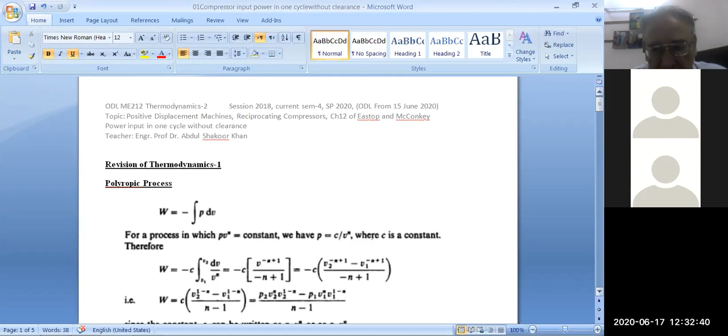Now, in the waiting room, I am admitting two more, and let me start the lecture. So on the screen, can you see my screen, my computer screen? Can you see my lecture notes, this document?

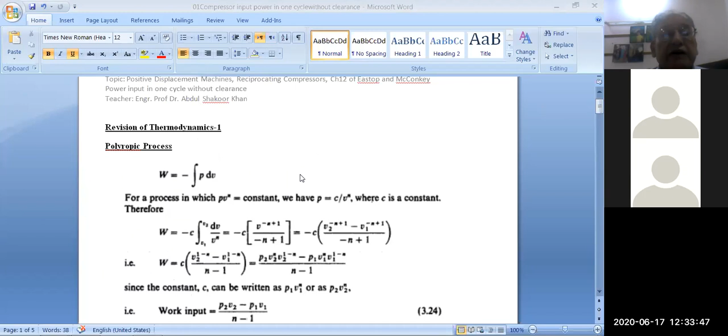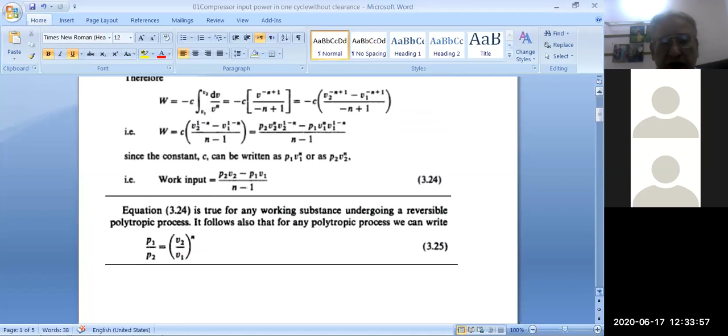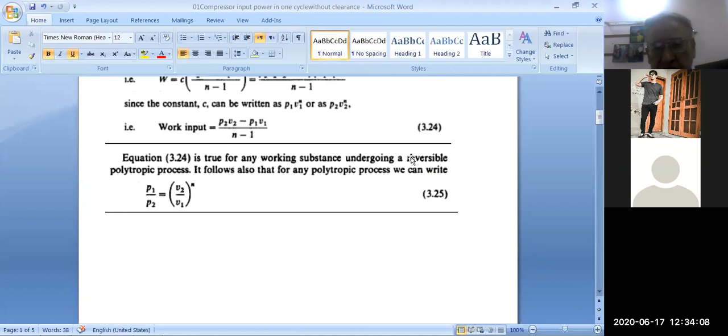Bismillahirrahmanirrahim. We have learned in thermodynamics 1 about the polytropic process, isentropic process, and isothermal processes, and we have presentations like this. So work input for the polytropic process is derived from the integral PdV, and in PdV we put PV raised to n equal to constant. From there we derive this relation, equation 324. Now we will need the relationship P1 upon P2.

Now Hey, what do you want? Hello? Now,

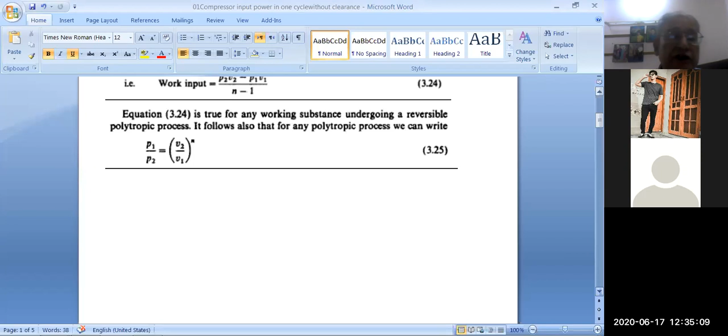Now, equation 324 and 325 are in front of you. Can you see it? So P1 upon P2 is V2 upon V1 raised to n. This was derived in thermodynamics 1.

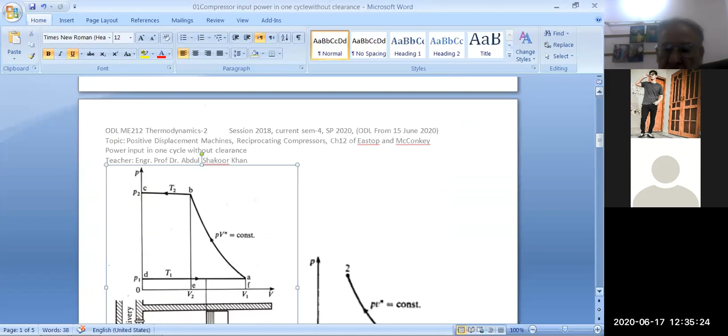Now we are talking about reciprocating compressors. In reciprocating compressors, we first draw this diagram, which is called the PV diagram. This PV diagram is also called the indicator diagram, pressure versus volume.

My God, it disappeared. Here.

So, pressure versus volume diagram, process A to B. A to B is what is happening inside the compressor, the compression process, and its process formula is PV raised to n equal to constant, which is the polytropic process. D to A, at pressure P1, temperature T1, this line DA shows the intake or induction stroke. 1 to A to 2 is compression, and from B to C is exhaust at constant temperature, pressure P2, temperature T2.

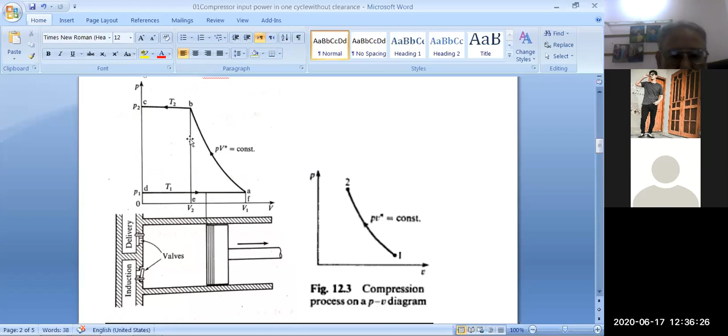In order to find this pressure and temperature at T2, we can use the polytropic formulas, and work input is equal to, from this diagram, the area behind the curve. So this is equal to this.

Actually, this chapter I have already taught you before midterm, so I am revising it now.

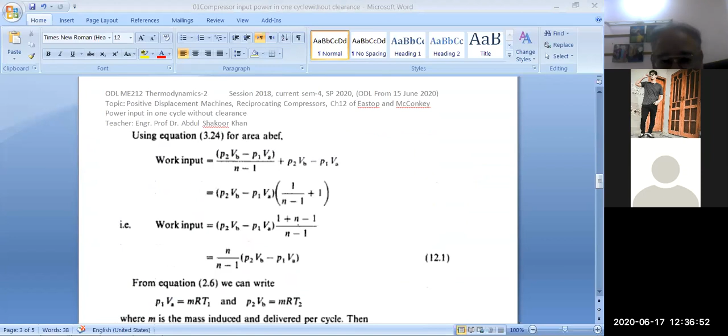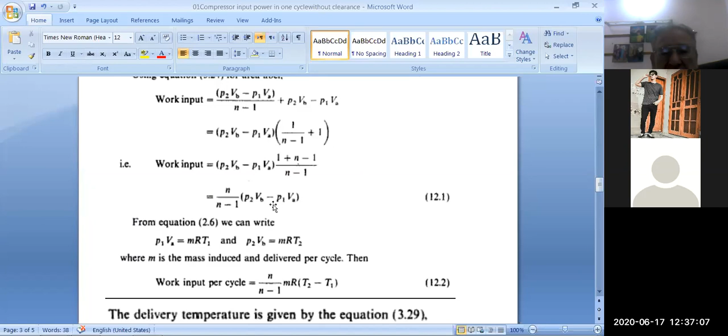So work input is equal to P given in this formula after deducting this area from total area. So we get N upon N minus 1, P2 VB minus P1 VA. Actually VB is equal to V2, and VA is equal to V1.

Again, go to this diagram and you can see how it is done. This total area is equal to work done. Look at this, A, B, C, D, A. This is the cycle, and work done in one cycle is area A, B, C, D.

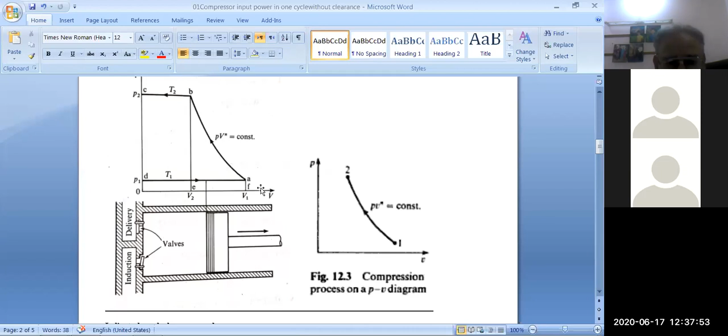So total area under this curve PV raised to N is first calculated, and then total area under curve CB is calculated. Then sum of these two areas, we subtract this area below AD, which is AD0F. If you see this diagram and then see this formula, you can understand how it is done.

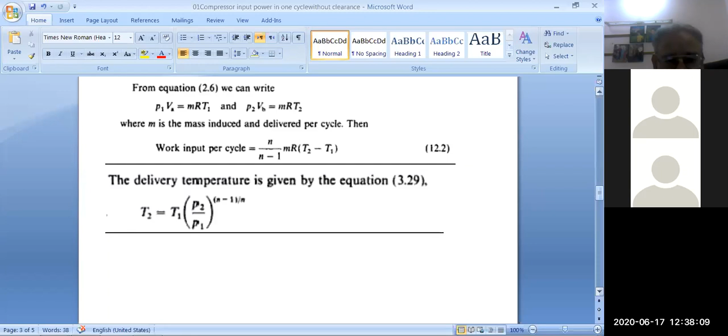In this way we derive equation 12.1. Then from equation 2.6, thermodynamics 1, we know for an ideal gas PV is equal to MRT.

So P1 VA is equal to MR T1, and P2 VB is equal to MR T2. From here we can convert volumes into temperatures. So this work input in one cycle is equal to N upon N minus 1, MR, T2 minus T1.

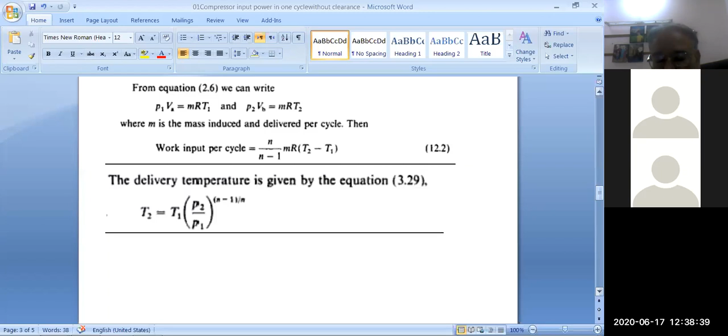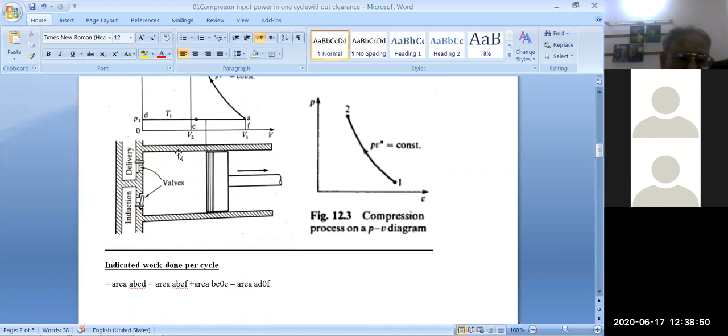Remember, this formula is only for this type of cycle where there is no clearance volume. Clearance volume is the space between top dead center and the cylinder head. So it is assumed in this derivation that there is no clearance volume.

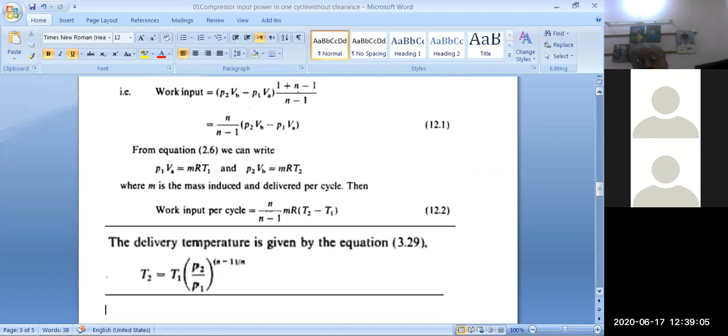Without clearance volume, this will be the work done formula. After this, we need temperature T2, which can be calculated by this formula: T2 upon T1 is equal to P2 upon P1 raised to the power N minus 1 upon N.

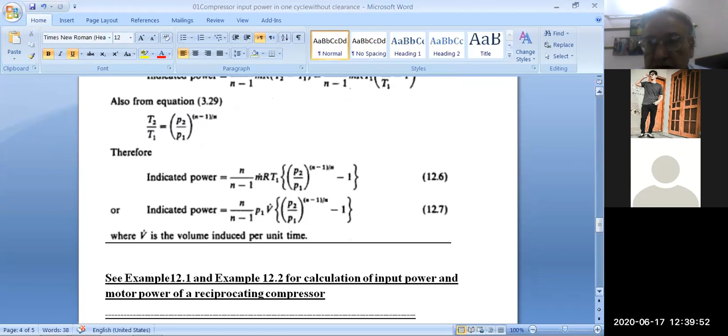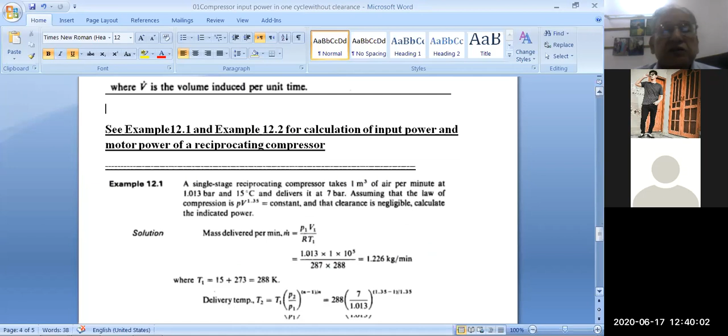Now we will finish here.

Now there is an example, solve 12.1. I'll give you this — it is in the book, and you will do it at home.

So let me open then another document.

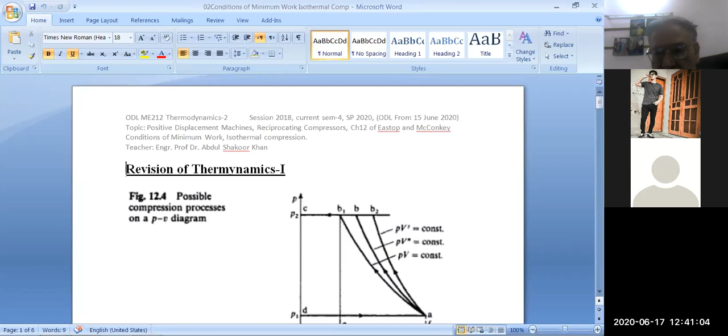Now I'll give you another document. Now can you see my another document — revision of thermodynamics 1, 12 point, figure 12.4 in front of you? Can you see it? Yes.

Okay, now the topic of this document is positive displacement reciprocating compressors, and we will derive now the conditions of minimum work.

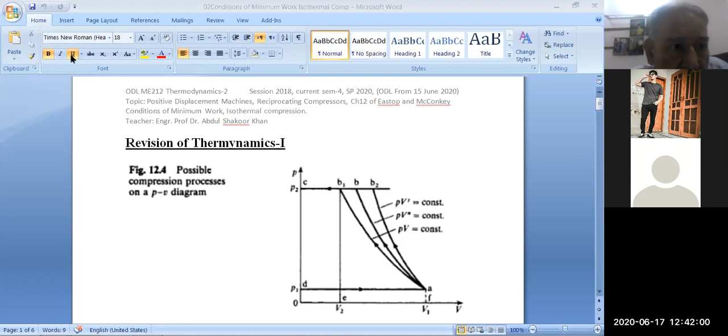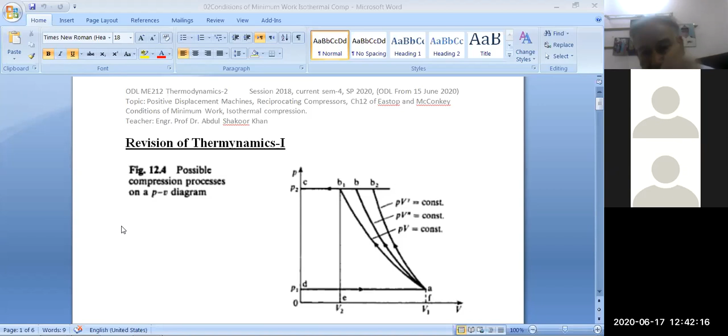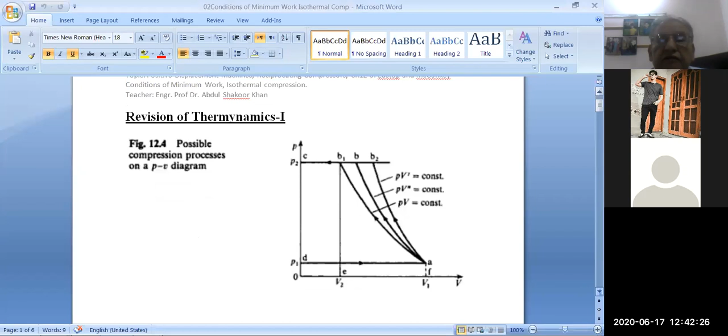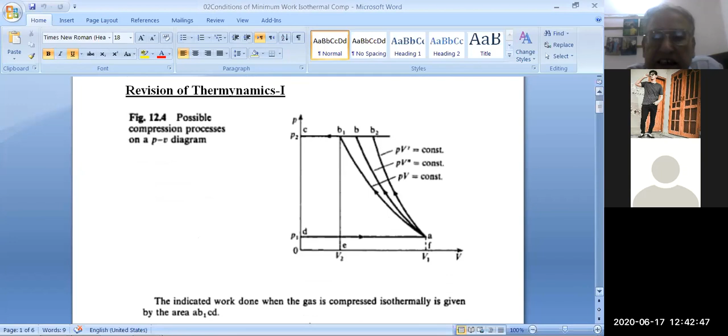Can you listen to me? Hello? Can you hear me? Yes sir, no sir, can you hear me? Everybody, can you hear me? Can you see the screen also? One says yes, the other says no — how can I continue my class? You have some problem with your own devices, learn to operate them properly. Network issue, no jokes on the online — okay, you're wasting my time, this is only a 30 minute lecture.

Now, A to B, A to B1, A to B2. These are three lines shown, processes from A to B, A to B1, and A to B2.

So A to B, the central line between these two, is PV raised to N equal to constant, that is the polytropic process. This outer line AB2 is PV raised to gamma, that is the adiabatic or isentropic line. AB1 is the most desired line because it has the least area of the cycle.

A, B, C, D — this diagram makes a cycle, and A, B1, C, D represents the minimum area.

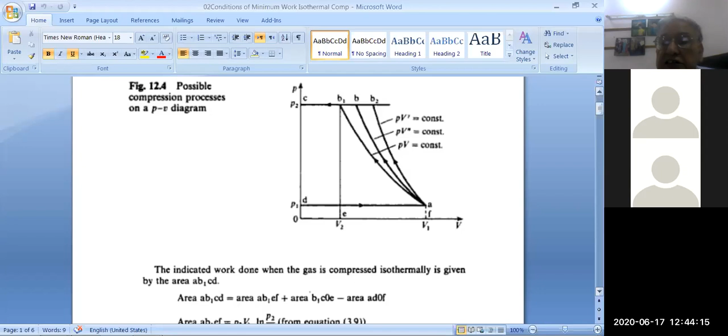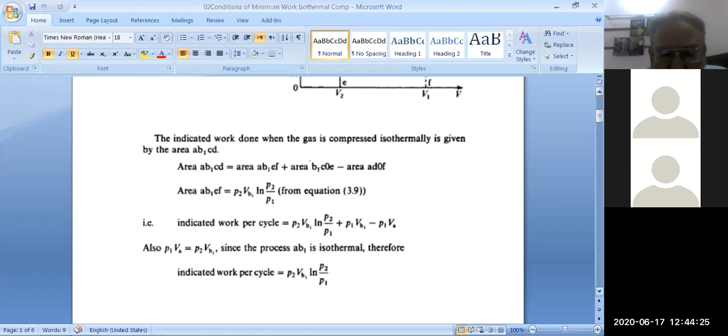So if we need the work input in a compressor to become minimum, then we must operate the compressor with cooling, such that its temperature does not increase during the process of compression. This is called isothermal compression. So the isothermal process is the most effective process from the point of view of minimum work input.

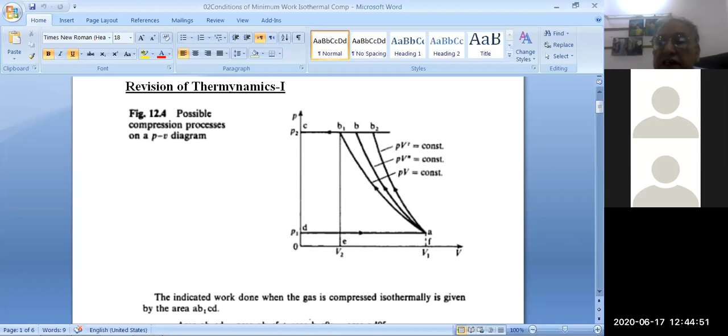So here also we can calculate area like this. Total area AB1CD is equal to area AB1EF plus area B1C0E minus area, which can be seen geometrically from here. This total area equals area under this curve plus area under this curve minus this area. So area AB1EF is equal to P2 VB1 multiplied by log P2 upon P1, and from here indicated work per cycle can be calculated as P2 VB1 log P2 upon P1.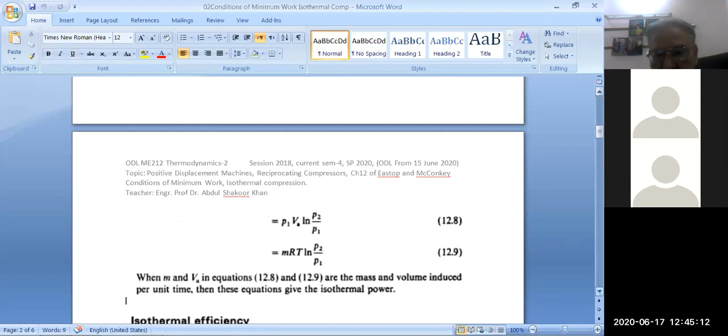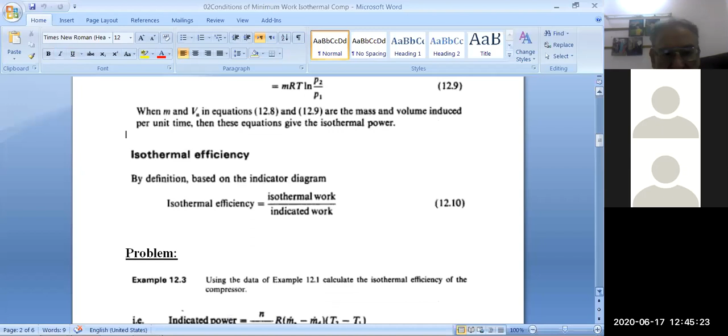Now from here we can calculate that work done isothermally is equal to MRT log P2 upon P1. Now isothermal efficiency is defined as isothermal work divided by indicated work, given by equation 12.10. It is in front of you.

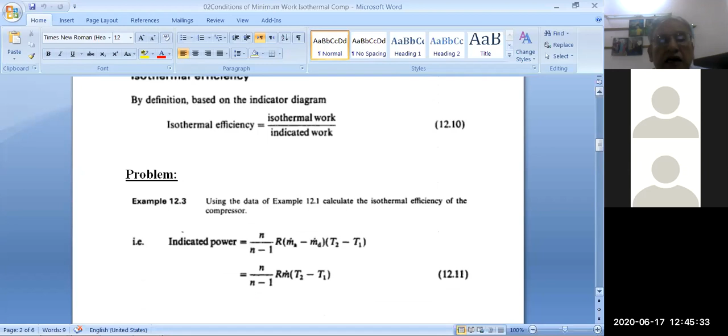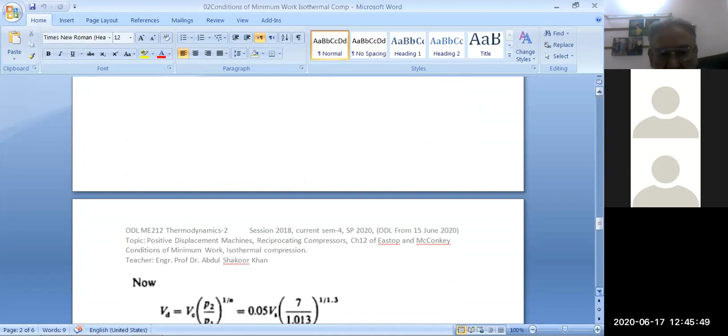Now after that you will solve example 12.3, it is in front of you, in the book and rewritten here also. Then there is problem 12, also solved as example 12.4. Then there are these two solved examples here, and you will see at home. Do it with your own handwriting and submit it as homework. Then I'll give you separately homework with a given day.

So with this I must go to the next page, which is compressor work in a cycle with clearance. Up till now you have seen the polytropic process and isothermal process of a cycle where there is no clearance in the compressor, and now with clearance there's a lot of difference. Why? Because...

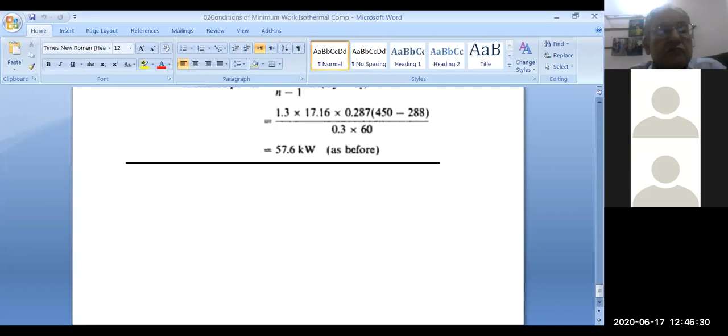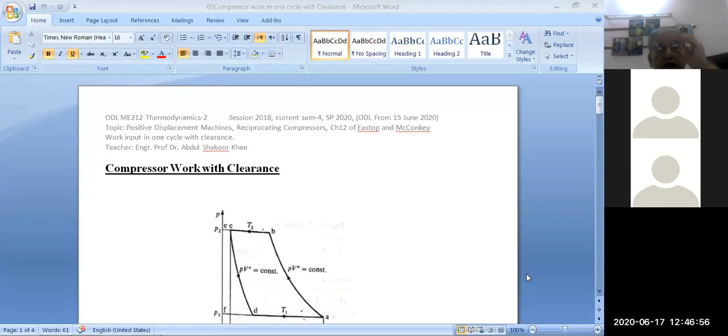Now let me share again. So compressor work, can you see it? Now on the screen should be compressor work with clearance. Am I right? Can you see this page? Compressor work with clearance.

This PV diagram is different from the one shown previously on the last two pages. But here, this is the clearance, CE, this space, VC, shown with my cursor. This is because after compression from A to B, the discharge valve will open, and at constant temperature and pressure P2, T2, gas will discharge. But the compressor piston has to come back from top dead center to bottom dead center and reach this point D. This is the compressor, this is top dead center, this is clearance, and this is after return to bottom dead center. But there was gas trapped in the clearance volume.

Because suction and discharge valves close immediately after top dead center, and when the compressor moves from top dead center towards the right, towards bottom dead center, fresh induction will not come in unless the previous gas trapped in the clearance is expanded up to point D. Because of this, there is a lot of effect on the efficiency of the compressor. The compressor cannot take full induction because of this entrapped gas inside.

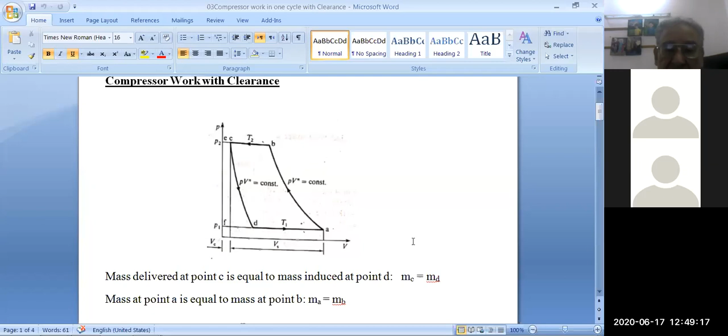So actual suction volume is less than the displacement volume. Displacement volume is just the physical volume which the piston travels from top dead center to bottom dead center, shown here as Vs, the maximum volume available. But actual volume is DA, so VA minus VD, this is called the induction volume.

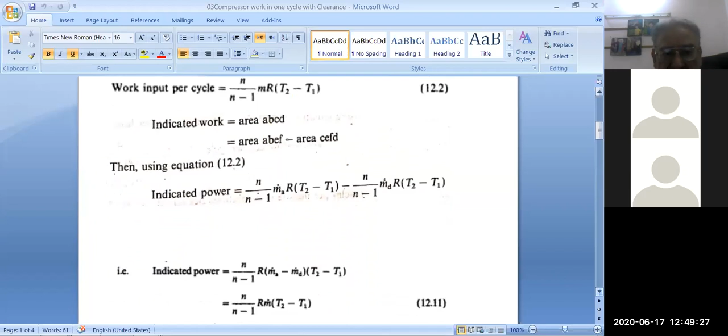So work input in this case will be N upon N minus 1, MR, T2 minus T1, and indicated power with the help of area we can calculate like this. Indicated power finally is equal to equation 12.11. And since temperatures can be converted into pressure, because we know that T2 upon T1 equals P2 upon P1 raised to N minus 1 upon N, with the help of this we can calculate like this.

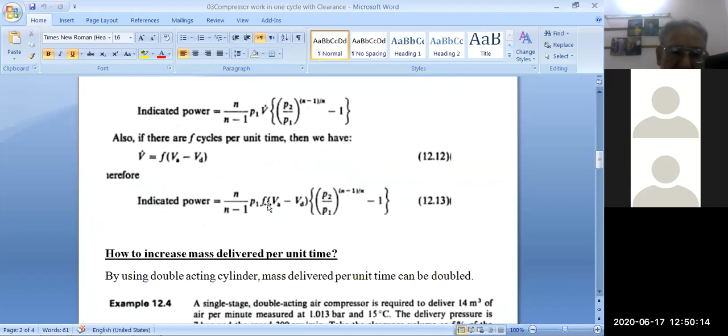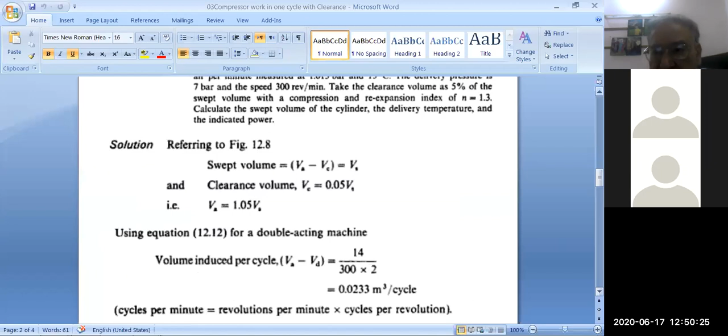So here V dot is the actual volume induced, which is equal to VA minus VD, and this was for one cycle, the indicated work for one cycle. If there are F number of cycles per unit time, F cycles in 1 second, then we multiply this with F, and the formula becomes this. So this is the final formula for indicated power of a reciprocating compressor with clearance.

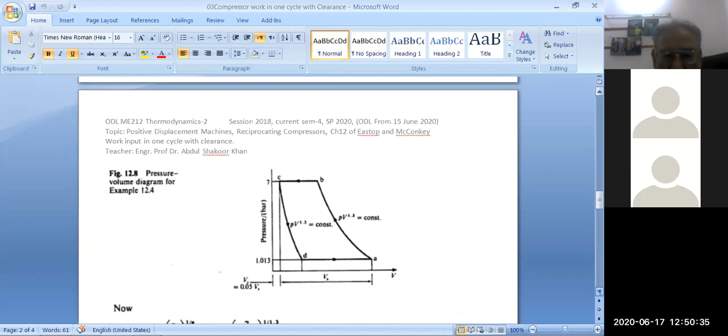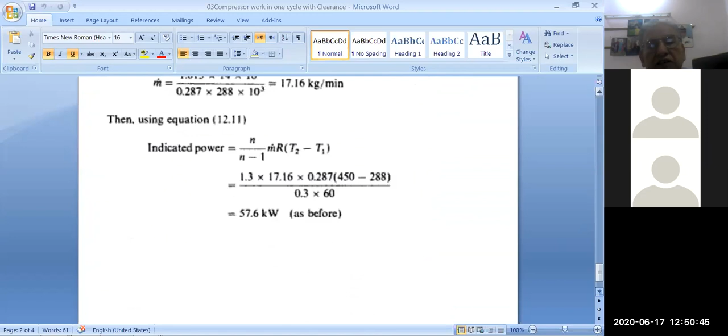So then after that you will calculate example 12.4, and this example will show you how to use this formula to solve the problem, for indicated power and all this. Now another type of solution is given here, two types.